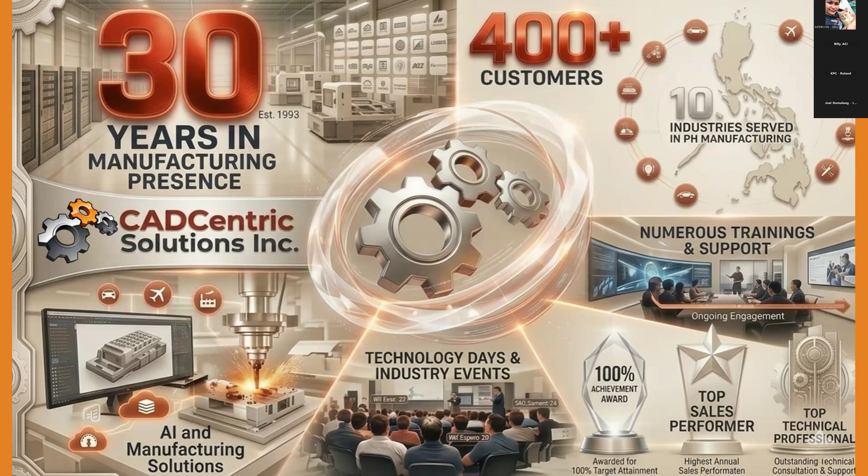As a tier 1 supplier, we excel in customer demos, trainings, and support, achieving the highest new customer acquisition in the AP South region in 2025. Beyond webinars, we also organize successful industry events and technology days where customers can explore new technologies and interact with other trusted suppliers and partners. Our achievements last year include the 100% Achievement Award, Top Sales Performer in CAA region, which was awarded to Miss Luz Basan, and Top Elite Engineer in CAA region, which was awarded to Mr. Claude Santos.

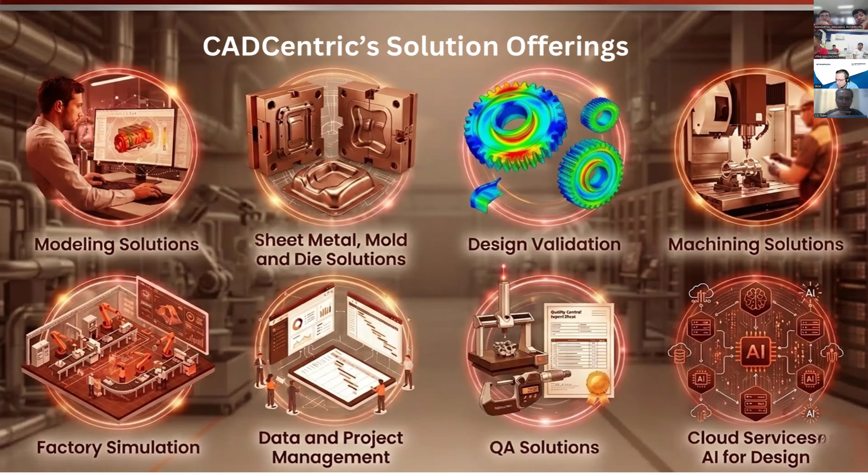I know trial and error may be a common approach and it works, but it also comes with challenges like rework, delays, and material waste. If we look at the manufacturing landscape here in the Philippines, industries like automotive, electronics, and metal fabrication continue to grow, and many of our companies are part of global supply chains.

That also means higher expectations—faster delivery, better quality, and lower cost. So the challenge is that a lot of validation is still done physically.

Of course, you design, then you test, adjust, and repeat it. While that process works, it's not always efficient, especially when multiple tryouts are involved. So the question is, how do we reduce trial and error and catch problems earlier?

This is where we're seeing a shift toward a more simulation-driven approach—validating the process during the design stage instead of during production.

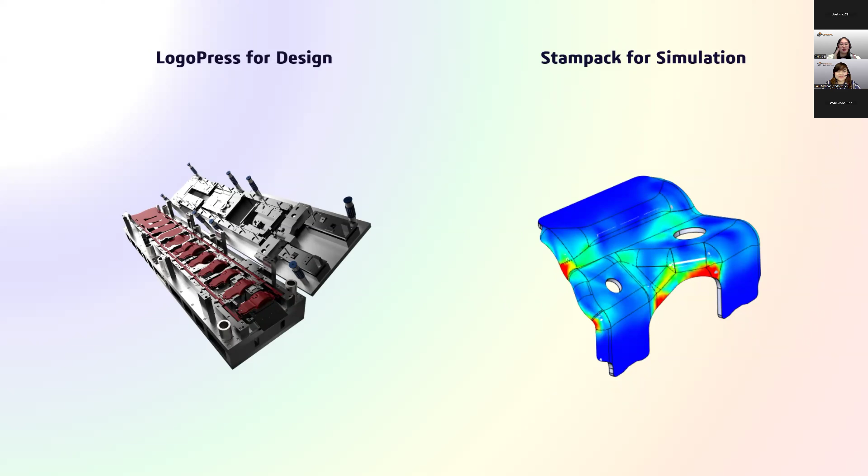That's why what we'll be discussing today is how tools like LogoPress for design and STAMPACK for simulation can help you move toward a more efficient and predictable workflow. So with that, let's start our technical discussion.

To guide us through the technical discussion, we have someone with extensive experience in the manufacturing industry, who has worked closely with companies to improve their processes and efficiency. Today, he will discuss common challenges in the industry, such as trial and error, delays, and scrap, followed by a brief introduction to LogoPress. He will also share how these solutions can be applied in the Philippine market, along with their benefits on a global scale. With that, I'll hand it over to our technical team leader, Sir Sonny Rivera.

Sir Sonny? Yeah, thank you Miss Ana. That was such a nice introduction. Okay, let me share my screen.

CSI will present LogoPress and STAMPACK. LogoPress can automate your tool and die designs—usually we make progressive dies, right?

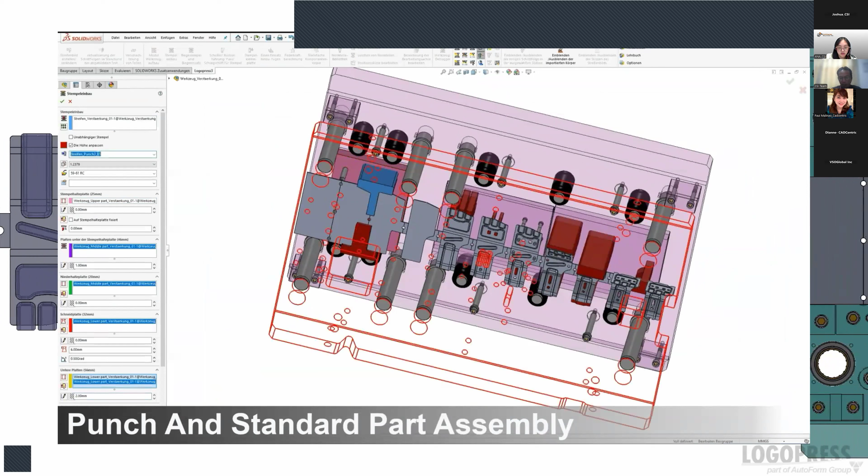LogoPress is very good in having a library of tool structures. Even the standard components, we have them there, prepared so we can just drag and drop, choose from our library, and it automatically inserts into our tool and die components. LogoPress has at least 100 plus components, supported by at least 50 different manufacturers of die and components, die design components, and also plates.

Usually we order these plates in advance so production is faster, instead of buying raw materials and having to machine it, flattening and squaring. Usually we buy it already as blank.

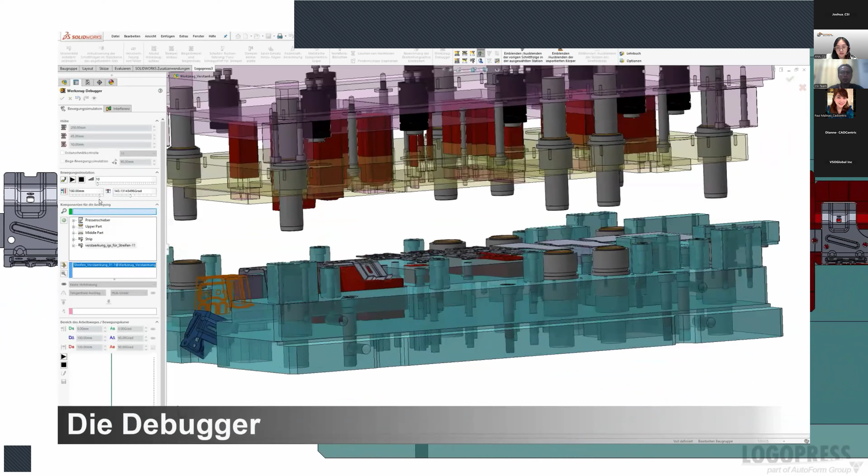Nowadays, when I was in a tool and die manufacturing company where I was also a leader, we used to buy our tool structures from Japan. From there, we design the punch and die ourselves, so that's what we create to make production faster, since we are targeting at least 4 to 7 dies per week.

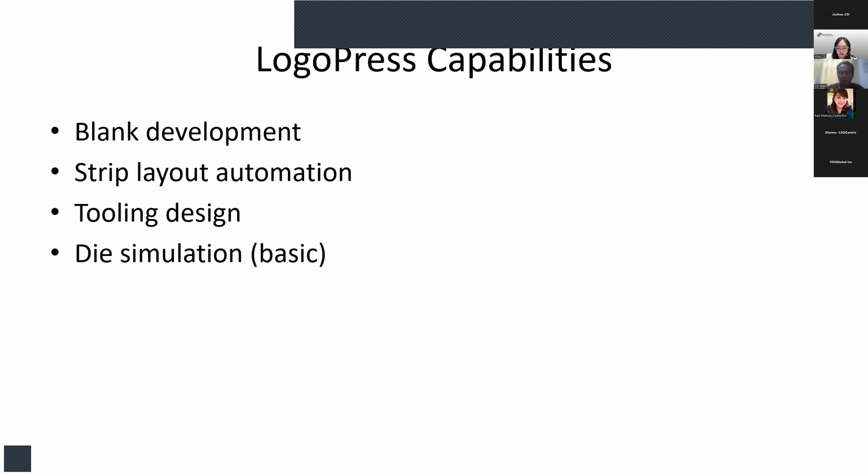Other than that, we have more challenges during our die design, like springbacks and dimensional accuracy problems. Not all materials behave the way we calculate, like when we think if we bend it 90 degrees it will automatically be 90, but we have springback. Depending on the material, whether it's stainless or plain carbon steel, the springback varies, so we need to adjust.

Dimensional accuracy is really the biggest challenge, because at the start of the process we just estimate our blank size. Later on, after the whole process happens and we measure the actual parts we tried out, only then can we adjust the blank size.

So what we do is always use laser cutting for the blank size, or what's called wire cut. Other challenges are the trim lines in blank development, and also thinning and cracking, which we usually encounter during the tryout process.

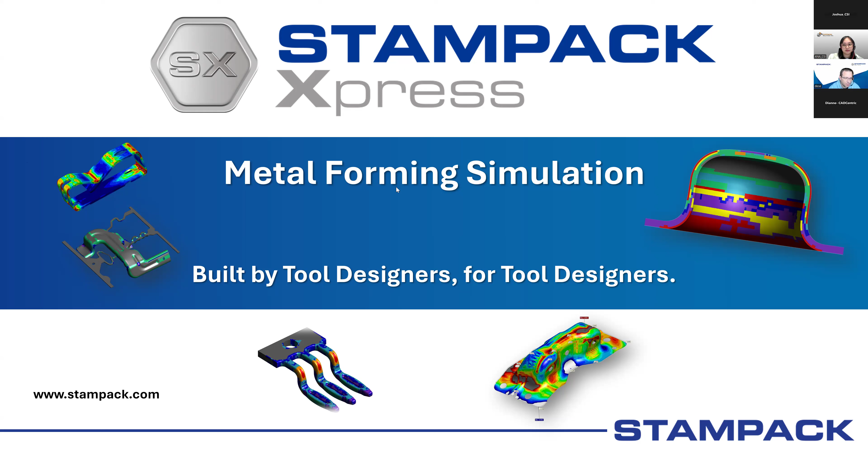I think you will definitely reflect on your own daily processes during this presentation, thinking about where you are located now, and where you could be located by looking more into digitalization possibilities, especially with the CAD system and the simulation path, to combine your actual structure to get more benefits out of your processes, and of course, later, cost saving and time saving. But I will come back to this topic later.

So first, regarding our company, we are STAMPACK GmbH. STAMPACK GmbH was founded in 2018. The STAMPACK simulation solver itself is much older than our company. The first commercial version of STAMPACK was on the market in 1995. The structure of the solver was completely developed and innovated at the University of Barcelona in Spain.

The software grew over at least 20 years until 2018 in different kinds of market segments. But coming from the university side, it was some kind of scientific software, not directly specified for the industrial market itself. This was the opportunity where STAMPACK GmbH was founded. We had the possibility to acquire the complete team from the former STAMPACK version to bring the software to the next level, to an industrial standard level, where we feel the pain and gain of our customers and implement it into a better, more competent and smarter software.

So in 2022, the release of STAMPACK Xpress was fully made. And we've been working for 5 years, where the big Autoform group knocked on our doors and asked us, okay, what are the possibilities we have to get a better combination in the whole portfolio?

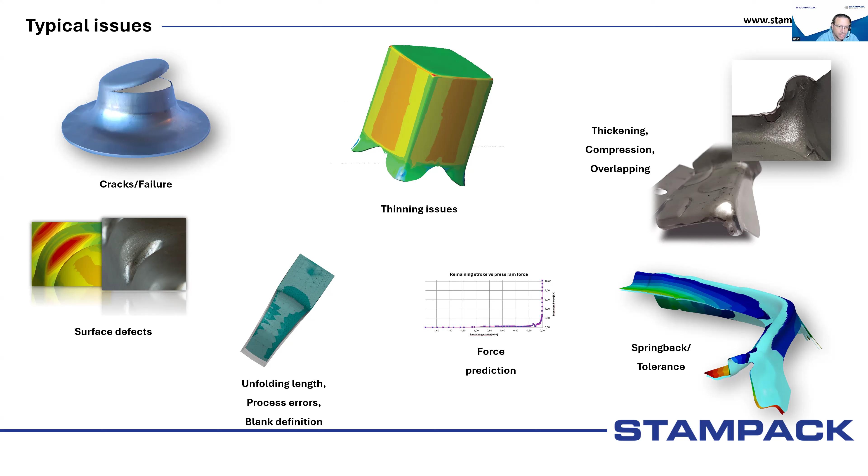So when we combine it into a specific area, I have selected four examples just to understand what we can do with simulation for these, more or less, easy examples. When we have some kind of blade like that, detection of cracks and correction of cracks is one of the parts you have to do. There are some typical areas in certain parts where you have problems.

Another one is some kind of crimp connector part. What are my correct bending angles to get the correct springback? What are the correct bending angles to set up one stage after another, to more or less close the material completely and in a good way?

Or the springback compensation. When we have springback issues, anything that happens in this area, maybe we should have a closer look. We can also go inside this one to feel through a little example for that. What is the challenge?

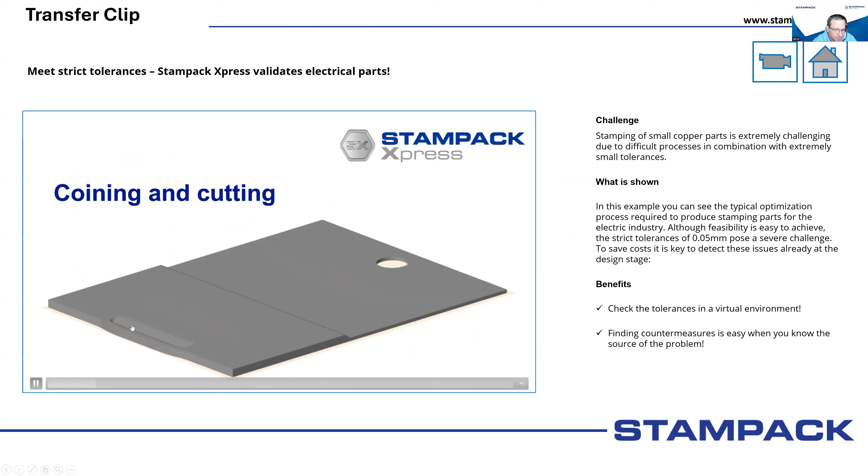More or less, each step will be simulated in the software, each single step with the tool design you want to try. You see in every stage what's happened with the part. You see the bending operations, you see the coining operations, you see the forces needed, including the forces needed for holding down the part.

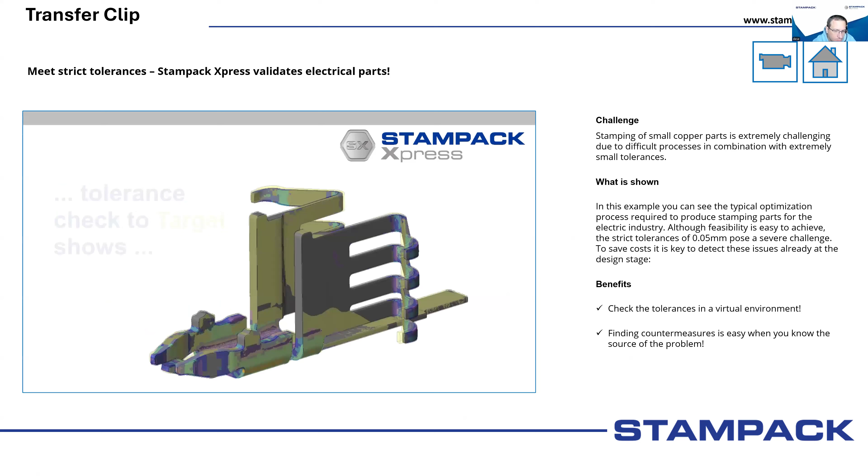And of course, then you get your results later on. Then you can compare it to your optimal design and see, okay, my safety zone, so my feasibility itself, is quite good. But when we check the tolerance towards the target we want to have, we find some strong differences. What can we do? What's the idea? You see here, we have big differences.

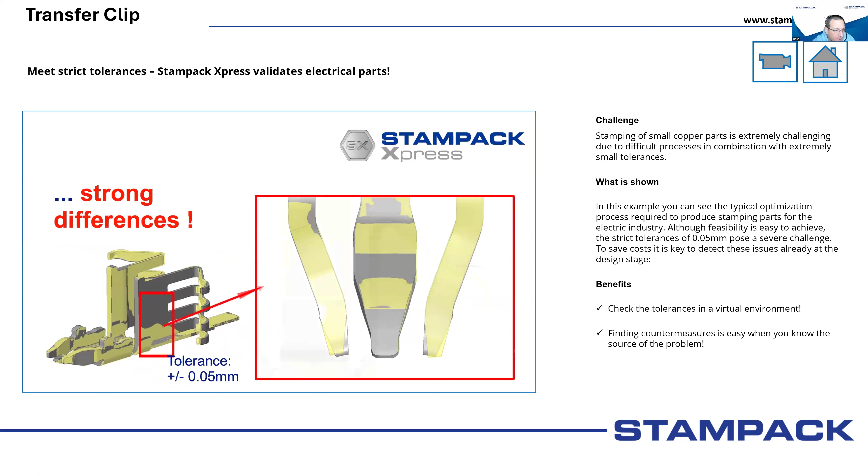By far, it's no problem to have that, because everybody knows in most cases what to do. We have to overbend, we have to rethink the design. But the problem is we only know it once the part is already manufactured, and that's the big problem we have.

So we have to transfer this approach into an earlier stage of the design phase. That's the big approach towards simulation. And to clarify that much more... oh, I'm sorry, I'm off of this presentation. Just one second.

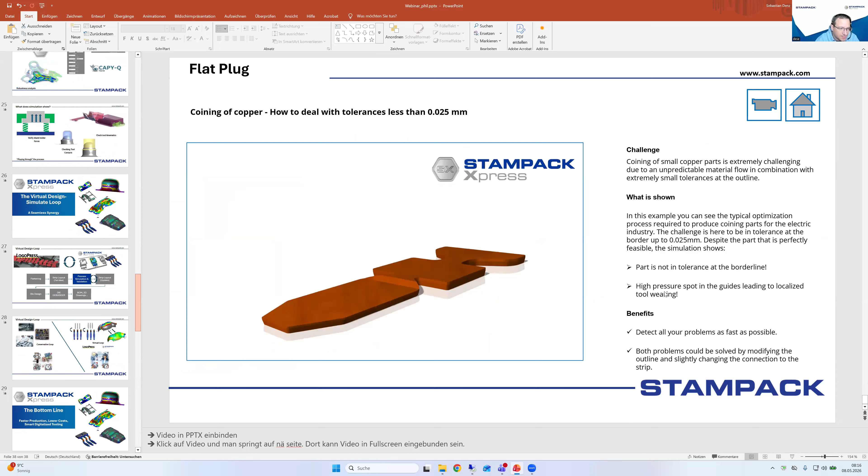Then we have to do a tool design, a tool assembly, maybe in between also a checkup tool, to see if any different areas are specific for us, and we go to our physical tryout. From the theory, it says that more or less 70% of the tool costs are included in the area from the product until the tool assembly, and 30% of the costs are included in the physical tryout itself.

Doing the tryouts, doing the loops you have to do, quite normal. And of course, when we find out that we have some problems in the first tryout of the tool, in the worst case, we have to go all the way back to the method and rethink our method plan in general.

This can have a big impact on the costing, the time, and all the related employees you use for that. Because when you have to recheck a physical tryout, who's included? There are the guys from the tool shop floor, the design development area fully included, some team leaders are included. So a huge impact on the personnel area is also included in this process. This is more or less the big part we have, not only the material part but also the physical part that we need in that case.

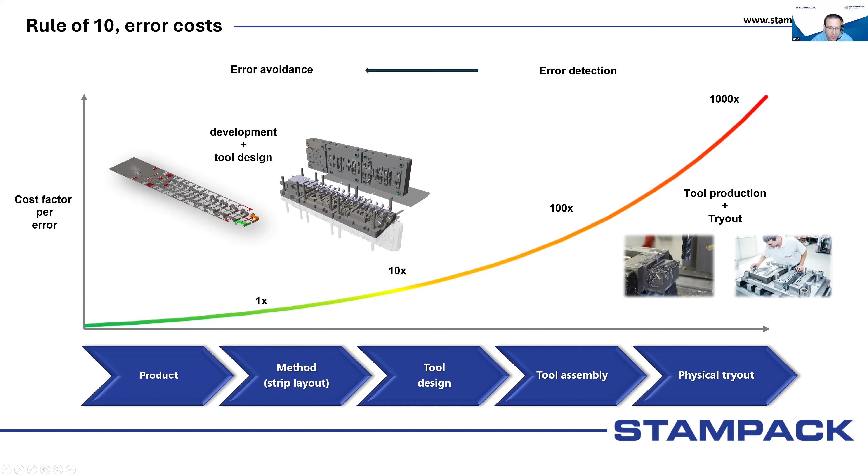The idea is to say, okay, when we check, or we have any error in the tool for example in the process, the later the error detection is, the higher the costs. That's more or less theory. What we want to provide is that we don't have these problems themselves.

So when we have the product chain, we integrate the simulation in between the method planning, strip layout design, and the tool design. We add more or less some kind of virtual tryout inside the process at an early stage. More or less we integrate a virtual press inside the process chain. That leads to us being able to do these iterations at a very early stage. And when you rethink about the costing, it's a very early stage, and only one person, maybe two, to discuss are integrated in this process. That's the big difference compared to the physical tryout.

First, of course, we have to design the process itself, so we have to do unbending as shown before. We have to rethink the method planning. For that use case we simply use the LogoPress area. So for that case, I have a short video for you to get a feeling, fully commented. I hope it works with the sound.

We have to check. Let's test, I think I have to share properly. So the video is now playing. You hear something actually? No, Sebastian, we cannot hear anything. Let's check, I think it's something with the settings of the Zoom toolbar. When you share, there's a button on your right side - you have to press share with sound. On the right side, you see it?

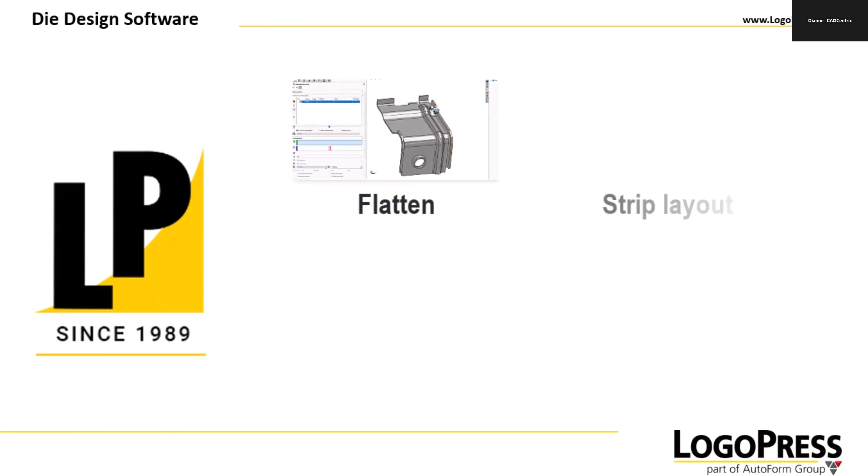With over 30 years of experience in die design, LogoPress has become a trusted worldwide leader, recognized for its powerful automation, intuitive workflow, and deep engineering capabilities. Designed for efficiency and accuracy, LogoPress enables designers to quickly predict their blank and evaluate formability risks, easily generate reliable strip layouts that can also be automatically updated for engineering changes, then model the tool faster thanks to hundreds of dedicated commands and features, including die debugger. Design changes are automatically done thanks to built-in parametric modeling. This significantly reduces rework, streamlines quoting, and overall shortens design cycles. LogoPress also integrates seamlessly into modern tool design workflows. When paired with forming technologies like STAMPACK, users gain a complete design and validation loop, allowing issues such as springback, thinning, splitting, and wrinkling to be detected before production.

Let's start with Flatten. LogoPress Flatten is a fast, intuitive, and highly accurate solution for generating flat patterns from even the most complex 3D formed parts. It enables designers, estimators, and tool makers to work directly within their familiar environment while processing both native and imported geometries with ease. The software excels at handling double curved geometry and complex 3D shapes. This makes it valuable for tool and die operations in industries like automotive, connectors, aerospace, packaging, and medical. Its support for full and partial unbending and automatic K-factor calculation ensures exceptional accuracy across a wide variety of materials and part conditions.

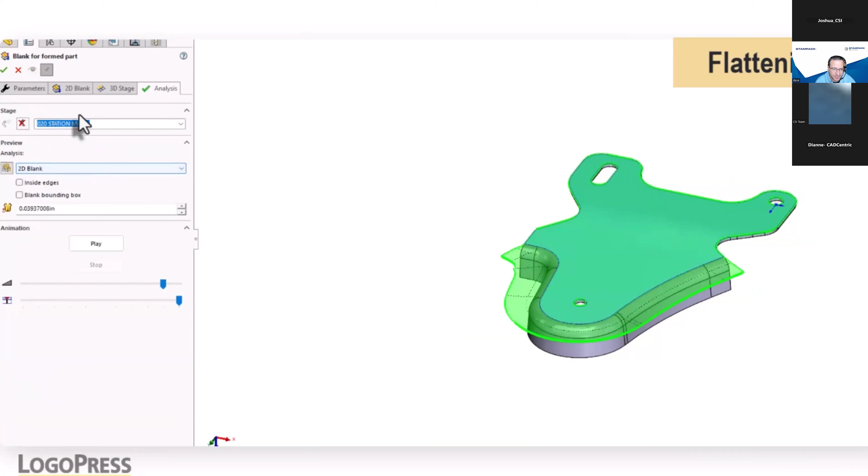Actually, there's no further comment inside the video. So what you see now is the classical approach to the unbending software. It's very nice, done well from the software side. What's also very nice from my side, because I saw LogoPress 2 years ago for the first time, is also the visualization itself in the software, to get a feeling of what's happening, to get the idea in a very common way, to get a first impression also of thinning areas for example, parallel to the classical simulation approach. That's more or less the right common situation in that case.

By enabling rapid flattening and early verification of forming behavior, LogoPress Flatten streamlines quoting, reduces uncertainty, and enhances communication between engineers and manufacturing teams, ultimately accelerating development cycles and improving part quality.

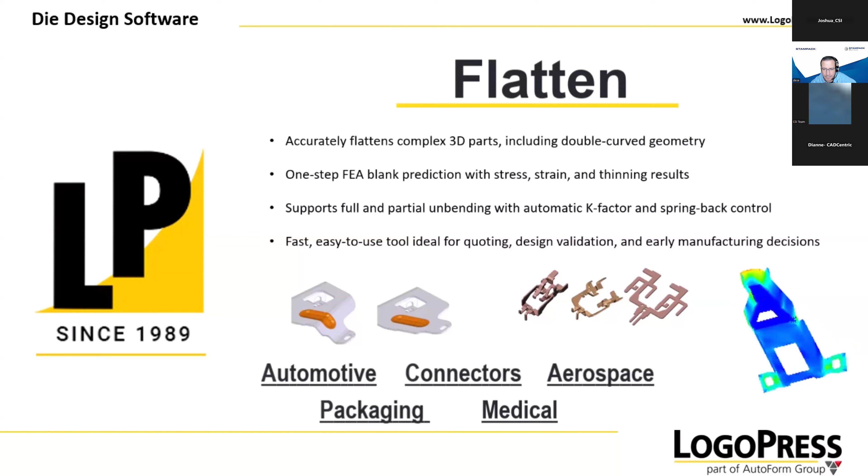LogoPress strip layout is the next step in the stamping workflow, transforming the theoretical blank generated in LogoPress Flatten into a complete manufacturable strip. While Flatten provides accurate FEA-based blank prediction for complex 3D parts, strip layout expands this foundation into a full process-ready layout used for die development, feasibility checks, and quoting.

With strip layout, toolmakers gain powerful capabilities such as rapid strip creation, material optimization, and reliable pitch calculation. The system also delivers cutting force and tonnage estimation, punch information, and other requirements needed to validate a concept and produce accurate quotes within minutes.

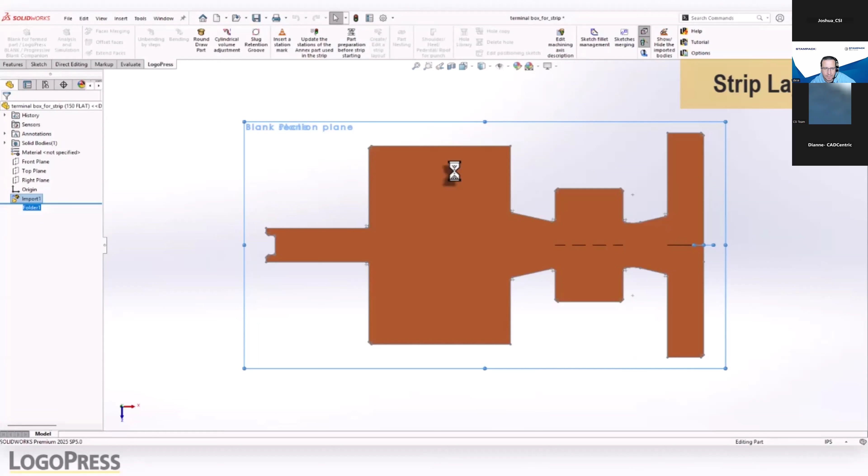The next step I will show now is to integrate each area of the layout towards the strip design, so the customer can decide which kind of bending situation we want to have. You don't have to implement all areas. You can directly configure which kind of area we want, which kind of stage we want, and in which station we want that. The system automatically regenerates the strip design for you.

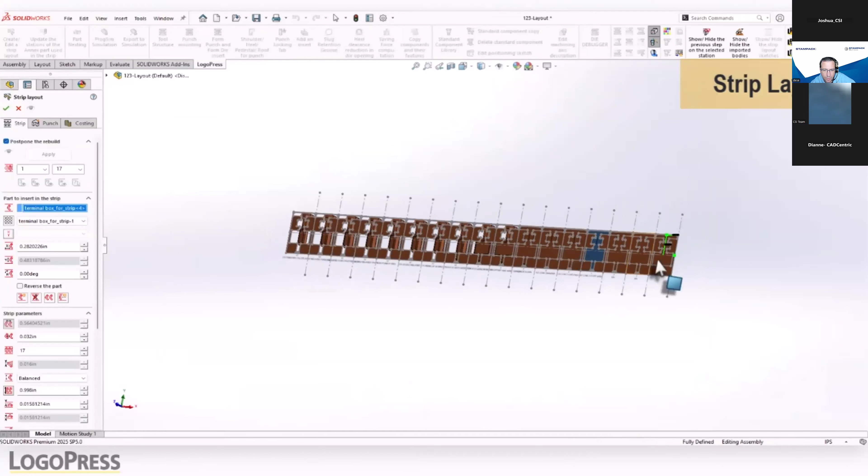You can implement idle stations if needed and continue with the full strip design. It will be fully developed, and that's what's going to happen now in a very accurate way, to have the full predefined strip design for the first stage.

Then of course you can do several adjustments for the first approach, doing the feeding, doing the in-between waste area, to check whether you have process-added material for the strip connection, for example. You can play around with the parameters, let me say it like that, to define the strip design as you want to have it in that area.

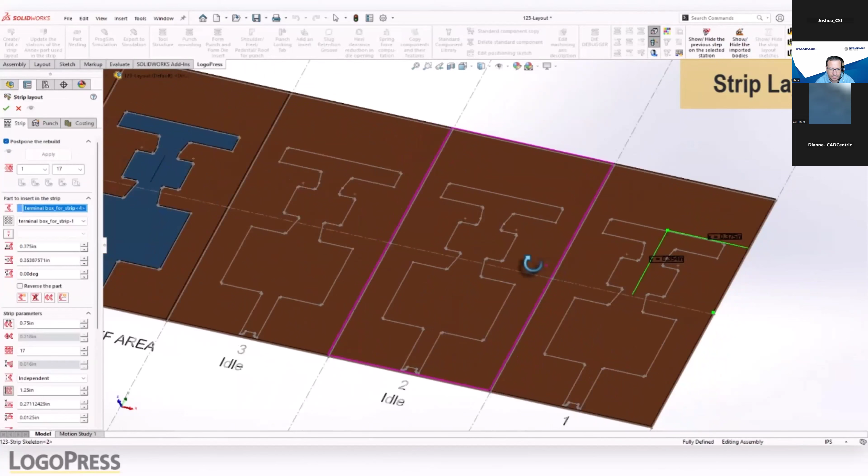What the video is now showing is setting up the first cutting punch. It will fully automatically detect the pre-shape area of the part, and you directly generate the cutting punch for that area.

In that case, the quick and dirty approach: we do the sketch with the area of the punch, then select the correct way, directly transferred throughout the complete strip design. It will be fully updated automatically when you do the first approach towards this, and then we go to the next step of the code.

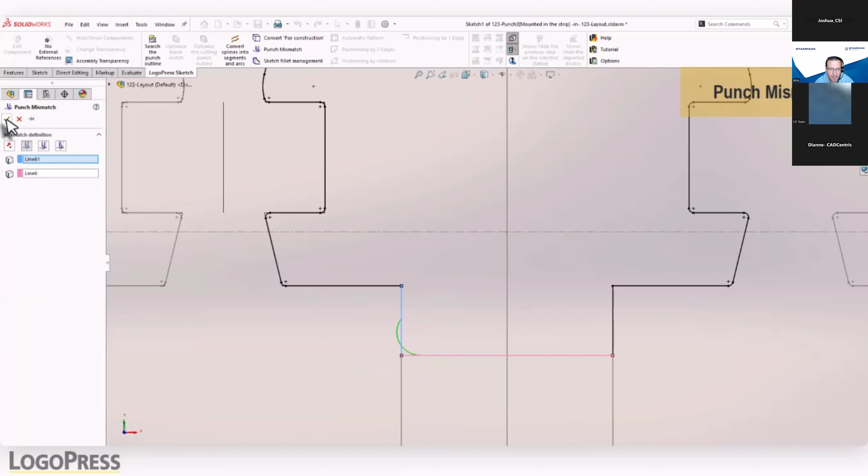So doing here now, adding the punch mismatch in different shape areas, defining what you want. Every approach is possible in that case.

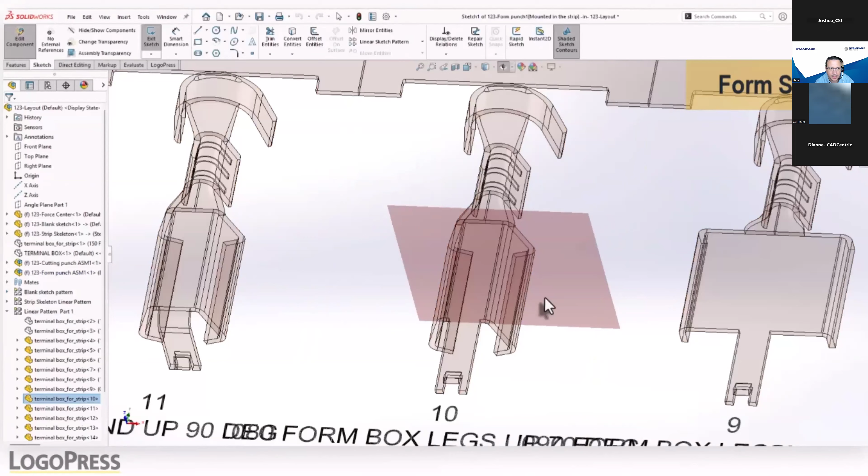And then finally have a closer look to set up, for example, also the bending punch. That's what's shown here, how to generate the form steels, for example. Very quick and easy - the system directly sees we have some surfaces integrated in the part, and then we regenerate the system here.

Another approach that we have in the system is the fully automatic generating of a strip design and also an unfolding design, using simple mathematical formulas to directly set up a so-called unfolding of a round drawn part. It's fully done automatically. You can also directly implement fully automatically the strip connections towards this, depending on what you want to have.

By turning an accurate theoretical blank into a well-structured strip, LogoPress strip layout helps teams standardize processes, reduce engineering time, and accelerate tool planning, from concept to press-ready validation.

Into our last subject, LogoPress Die Design. This is the biggest part of the LogoPress family. LogoPress Die Design is a comprehensive, production-focused solution built to streamline the creation of dies used for forming, cutting, embossing, and shaping sheet metal parts. Designed specifically for tooling engineers and manufacturers, it provides an intuitive environment for building accurate, manufacturable die designs directly inside SOLIDWORKS.

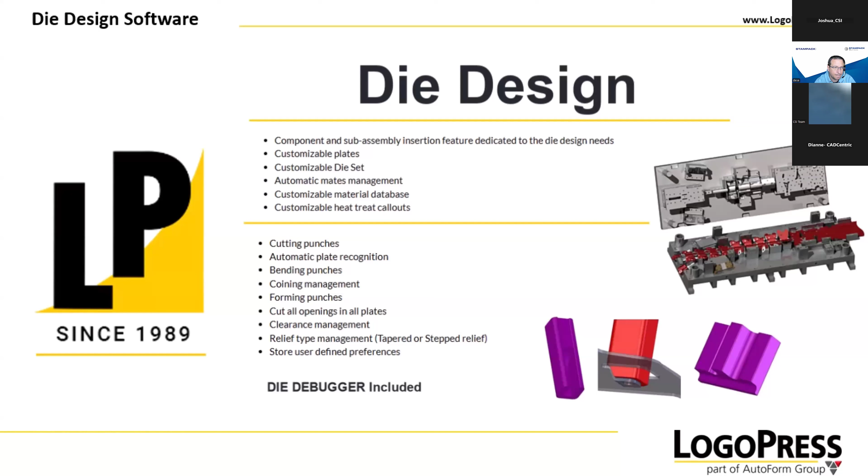A standout feature of the LogoPress Die Design package is the LogoPress Die Debugger, a powerful virtual simulation tool that allows you to visually test and validate how a die functions before any steel is cut. With Die Debugger, designers can animate the die's motion, detect interferences, check timing, and ensure components are behaving exactly as intended throughout the stamping process. This significantly reduces trial and error, shortens debug cycles, and helps catch costly issues early in the design phase.

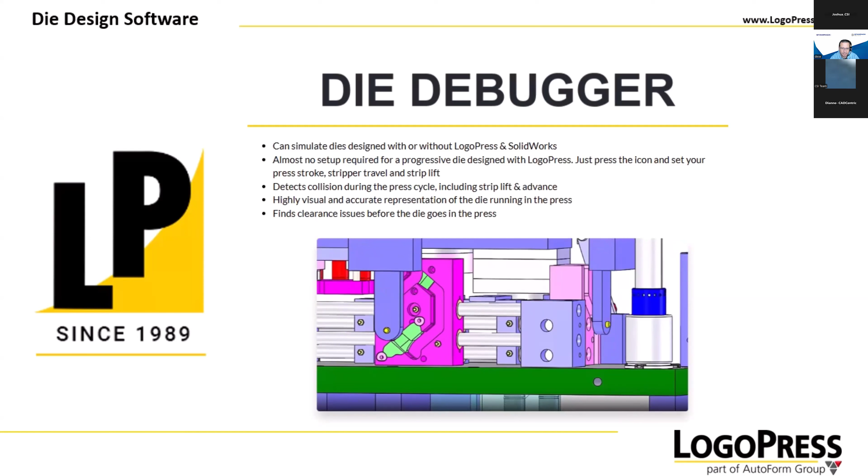Beyond this simulation, LogoPress Die Design offers an extensive library of die components, automated functions for building die sets, tools for working with strip layouts, and intelligent features that reduce repetitive tasks. Combined, these great capabilities allow engineers to design more efficiently, improve tool accuracy, and deliver reliable results with greater confidence. Whether you're developing single dies or highly complex progressive systems, LogoPress Die Design provides a complete workflow from concept to production.

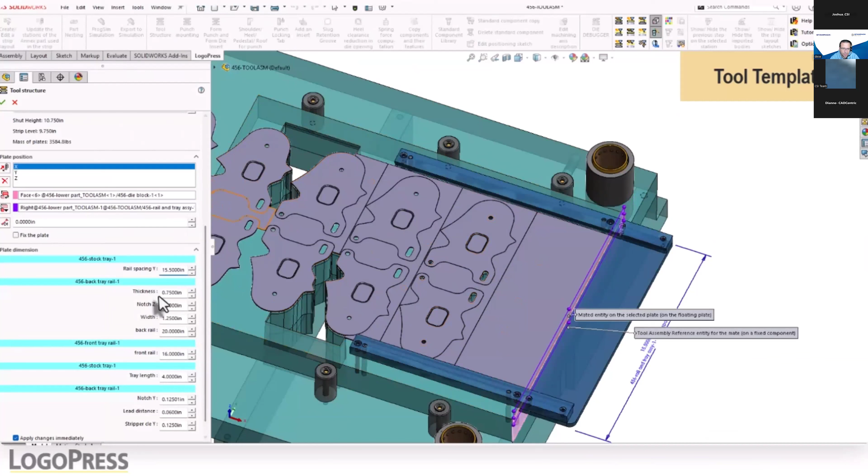So one last time, let's dive into the software. What we are showing now is the more or less predefined tool design, where we have integrated the base of the tool, also the top areas of the tool, directly going to the next step to implement the strip layout, to change the spacing, to define more or less the presets of this area, for the guiding of the strip design. So also here, several additions and adjustments are possible directly in the menu, not directly in the SolidWorks design, so completely menued by the system itself to change these areas step by step.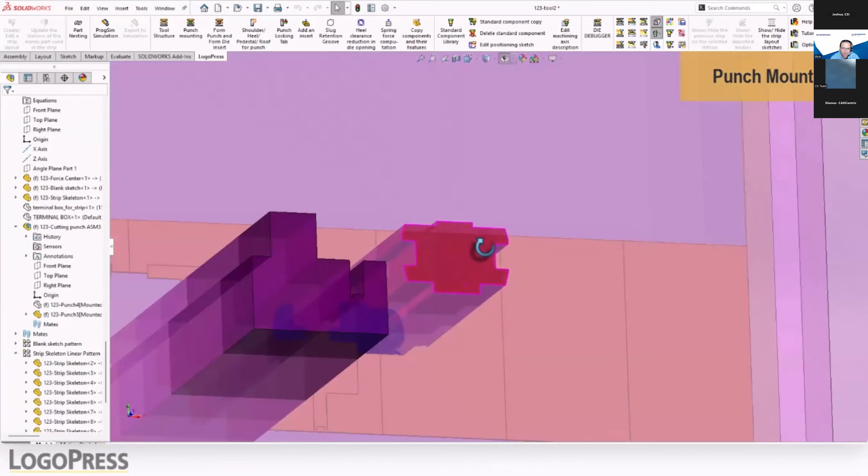Of course, the tool design takes a long time, so it's not fully shown here, but to have a feeling how it's working. What we see now is the direct integration of the predefined cutting punches, for example, the full redesign, and when we look forward to the result, also the full mounting of the punch, with the spaces. Also, you see that the area for the waste throughout the plates in the bottom part are fully integrated and can be fully predefined using your own standards directly inside the system.

Next step is showing the standard components. We have a huge database integrated in the system for standard components coming directly from the customer, from the areas here. For example, for Meusburger setup or any other suppliers you want to have, it can be fully integrated with the part itself and all the machining areas also.

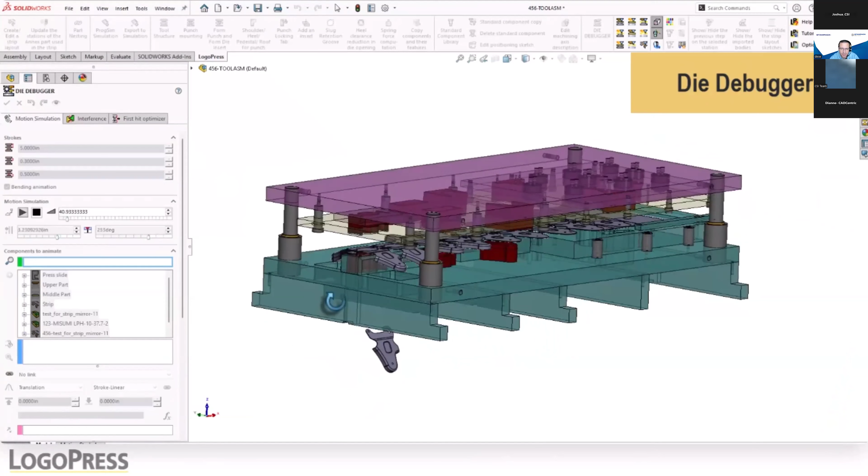So finally, we're going to the die debugger section to check if we have any interferences in the part itself. Do we have any mismatches? Do we have any faults inside the material that we're going to crash into on the first physical tryout? Do we have any functionality errors of the tool itself, and also to visualize the general movement of the tool? Now we go to the interference check, and you see, okay, there's something happening, and you can directly let the system show where it's going to happen. So we have here an error in between the stripper height. So this.

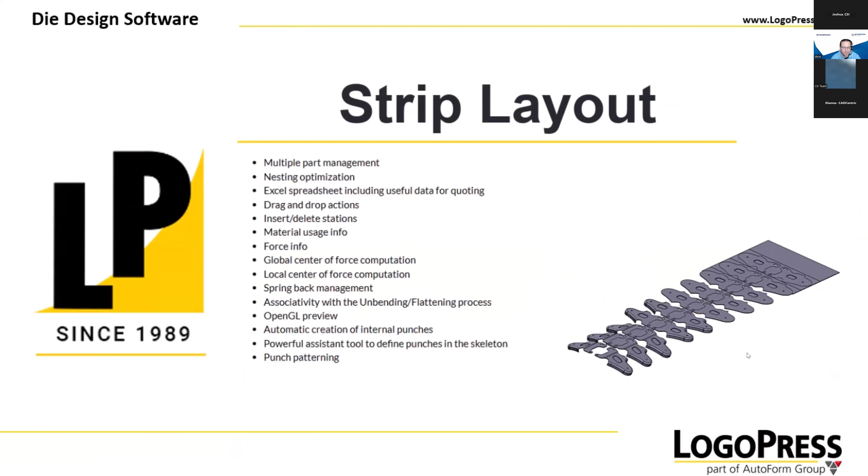So when we continue, we show the next step to the virtual press, to the values of simulation. As we've seen, we have two kinds of simulation solvers integrated in the software. That means for each type of part you want to simulate, you will have different requirements towards the simulation itself. So we have two solvers integrated in our software: the so-called shell simulation, which is the simulation on the flat base, and the solid simulation. The shell simulation is done for the classical automotive part, for thin sheets, meaning 1 millimeter or less in thickness, with larger radii.

For thick sheets with small radii, meaning the bending radius or forming radius is smaller than the sheet thickness itself, it gives you a suiting meaningful first impression, but not the detailed result you want. The shell result has a very fast, short calculation time and gives you a very fast and efficient result on one hand. For the other parts, especially connector areas or parts with compression zones inside, or a mismatch between thickness and the smallest radii, you have to switch over to the solid simulation.

Because the solid simulation is a much more detailed simulation in that case, stresses and strains along thickness are also considered. You have very high resolution towards the measurement, and maximal precision. It's very important to use in case of thick sheets and small radius, when you have massive deformation in local areas, and you have the possibility to detect surface defects in very, very high detail.

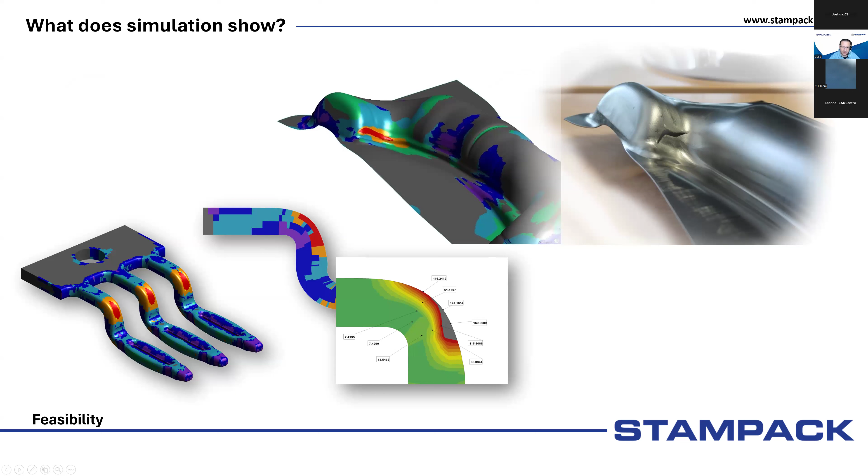But the much more important thing is not only whether it has a crack or not. The much more important thing is how far away I am from a failure. Is it more or less a running-along-the-edge situation? Are you nearby a fail or not? Or are we far away? Because this has two interesting features.

The first is when we are nearby the 100% marker, that means we're going into the fail. We have 0.7% left in our feasibility. That means any changes in the tool, any changes in the material, and we are running towards the crack.

On the other hand, when we have 20% left, we can rethink our design. What's going to happen when we only took 4 stages at least, and we planned only with 5? Does it have any effect? Can we go more risk towards our tool design? Because we know now that we are simply in good conditions. So we maybe also have a big advantage towards the competitors that want to have this tool.

So also in the pre-ordering of the system, in the first visit, you can say, okay, we at least planned with 5, but the simulation shows that with 4 it's also okay. And it gives you a big advantage also in the design.

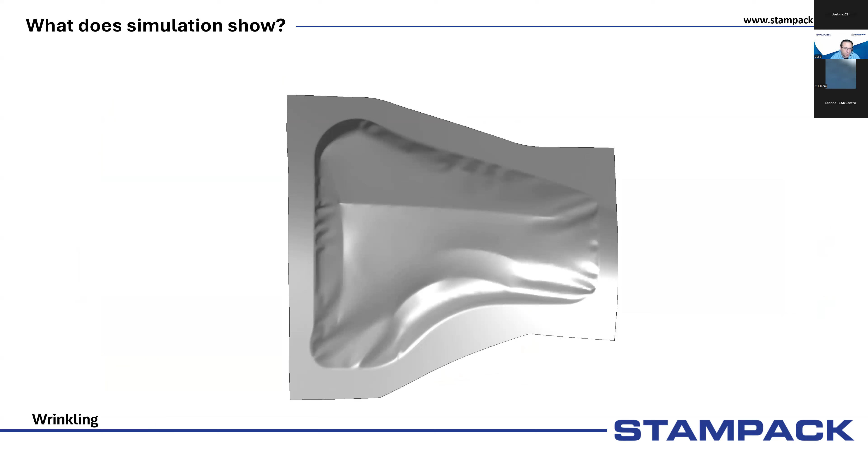Then the classical approach for automotive is the detection of wrinkling. As Sunny said before, it's a very big task in the topic, where we have problems and we have to decide if it's good enough or not. Where are they? What can we do to intervene in that area?

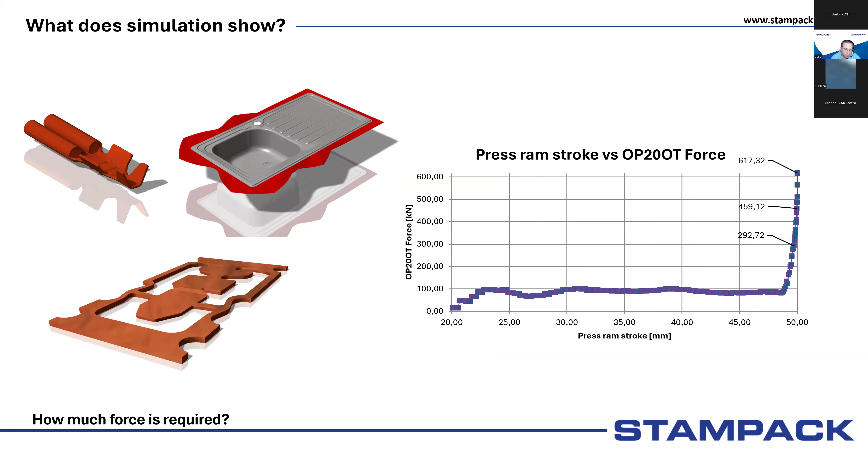Force. Everything that happens with force inside a tool. It could be the blank holder force, it could be the press force itself, it could be the complete cutting force you need, can be directly simulated virtually to give an idea of what kind of force we need for the hold down of the material, for the lifting of the material. Independently, you will get the full information inside the software.

And when we ask somebody about what he's thinking about simulation, what does it show? Then more or less always the guys have in mind the feasibility situation, crack detection. But much more interesting is how good is the quality of the part itself? Are we in tolerance? Of course, we have a feasibility part, it's quite good, but is it in tolerance, yes or no?

That's the big question, because this is more or less the final decision of our customer, that they say, okay, your part is good or your part is not good at all. You have possibilities to do the tolerance check, to compare the simulation results to the nominal part that we want to have, and see in which areas we are out of tolerance or in tolerance, to directly go back to the tool design or go back to the strip layout, do the first iterations virtually to recheck and get a better quality result in the first tryout later on.

Then the springback and the springback compensation. So what is integrated in the software? You have the possibility to calculate the springback itself. But on the other hand, the software gives you the idea how to compensate your tools to get into a good position towards the tolerance.

So it will be fully automated. Redesign your tools, run another simulation, recheck if it's better or not, run another simulation, recheck once again until we go into the line, we say okay, we are fully in tolerance, and then we take out these tools for the first tryout in the physical world.

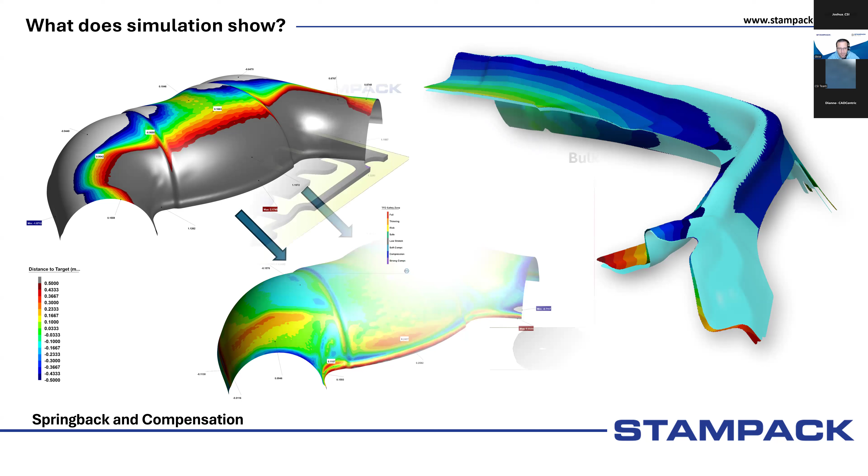A very interesting feature is the possibility of coining, because it's very related to the simulation of a solid solver. Some kinds of coinings can only be run with solid simulation, it's impossible to run such simulations with the classical shell simulation solver. That's why we have both options inside our system, so you can decide, okay, I have a part that's classical shell based, and a part that has to be calculated in the solid solver, and the customer can easily switch inside the software.

Trimline optimization is one of the biggest things we have in the software, because it's something fully made in the physical tryout. When you do the first loops inside your tool, you use a predefined strip design to check whether your predefined blank is good or not.

In the simulation, you can directly see what's going to happen, and you can tell the system, please redefine my initial blank outline to best fit the part. For example, we start with a first simulation where we have an initial deviation of 2.5 millimeters towards the final outline we want. The system then regenerates the blank cutting automatically for you to get closer to the target, and iterates as long as you want to fit the target more. Then you take this outline from the simulation back to LogoPress and redesign the strip layout in a very common way.

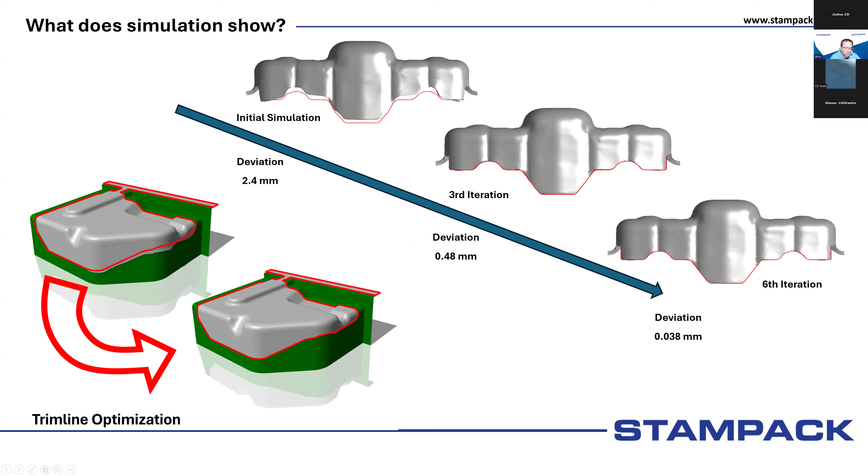Finally, we have the possibility to run a robustness analysis inside the software to get a feeling for which parameters in our system are the most important. Is it the material characteristics? Is it the blank itself? You can play around with the software and see that a variation of the thickness in the coil is a problem for us, or a variation in tensile strength could long-term be a problem. When the yield tensile strength varies, our target or tolerance goes out of the normal state. This gives a feeling for what is the most important parameter in our process, and what we have to check and secure so it's not varying.

Finally, very easy but very common is the educational possibility. You can play with the process inside the software. In the physical tryout you have to manufacture, then see what happened, then remanufacture and see what happened again. In the virtual tryout you can play around more: increase the blank holder force, see what's going to happen, lower the blank holder, directly see, and then you get a feeling for the process itself.

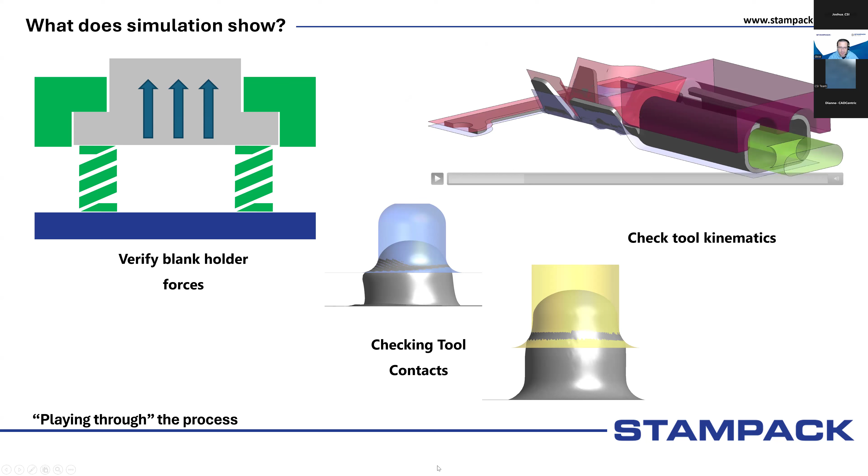When you look at this area on top, you also have the possibility to look inside the tool. In a physical press, you close the press and then you see the result, but it's very difficult to look inside. In the simulation, you have the possibility to use cutting sections, as in a CAD system, to see where the first impact of the bending parts happens. Does the material flow as I want, or does something happen that I hadn't seen before? Then we have to say, okay, we can't do that, we have to redesign that area to get a better result. That's something you can only do in the virtual simulation.

I want to go with you now inside the software to get a feeling for its usage, to see what you have to do to set up a simulation very quickly, because it's made from tool designers for tool designers, so it's very easy to use. We recommend at least 3 to 3.5 days of training to get into the software, because it's very easy to learn, since the structure of the software is always the same. Independently of whether we do an automotive part, connector area, or embossed sheets, it's always the same approach in the software. I want to show you on one stage how fast it goes to set up a simulation in our software.

So this is the interface you see now. We have here on top some kind of timeline, where you play from the first step to the last steps to the results. Left is your work area. So first, we go to the next step, and the system wants a name for the project, so we have to save it.

Next step, blank definition. First, the system wants from you the thickness - in our case, 3 millimeters. Then we have the decision of shell and solid simulation, and you can always switch this area as you want.

You can start with shell, switch back later to solid, or backwards if you want. You don't have to redesign the complete simulation itself - only click on this button and rerun the simulation. That's quite easy, and this makes it possible to more or less play the ball to each other.

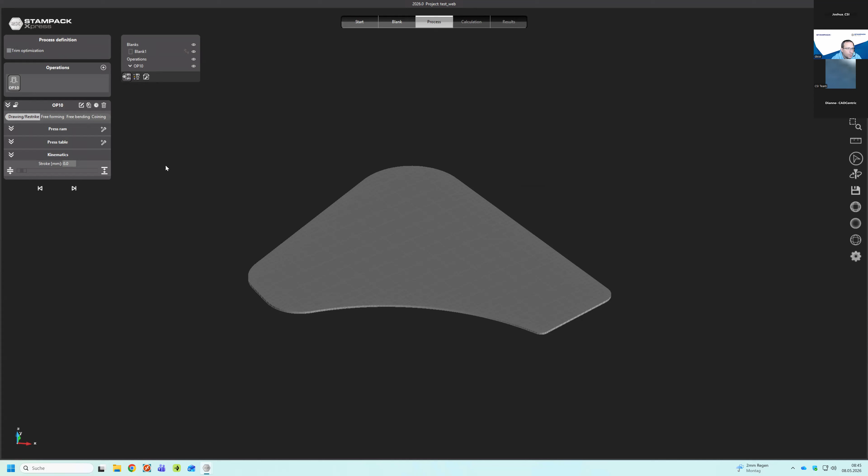What you need for that is simply to import the defined tools coming from LogoPress, for example - in that case, 2 tools, the upper and lower part of the part. So for the first stage, flattened based, fully integrated.

You can add it as classical step parts, as predefined STL meshes, so we are completely neutral on the inside of the approaches - also NX, Parasolid, and of course classical neutral areas are possible in that area.

The only thing you have to do now is simply drag and drop the tool inside the area where it is in your physical tool. We have a press RAM area, we have a press table area - simply drag and drop, that's a punch on top, and it will be directly inside. Simply drag and drop the lower part, and that's all.

Now the kinematics of the tool are fully ready. The system is loaded in a closed condition, so it knows that's the closest point, the deepest point of the tool. We simply open the tool and close it once again in the simulation - that's what the system is doing, more or less.

Now the system is running, so the complete geometry is handed over to the calculation solver - that's what we've seen here in this output information. Now it's starting.

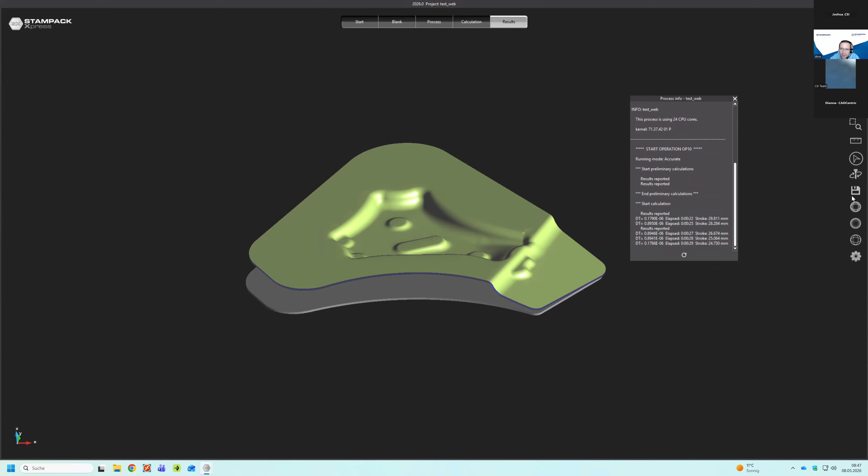I will run it just to have a feeling and to show you what's going to happen now. He first writes some results, and you see now, okay, we need at least 30 millimeters of stroke that will be directly calculated. And now he's starting. He's closing step by step the press. We can go directly to the result area and see what is the result actually.

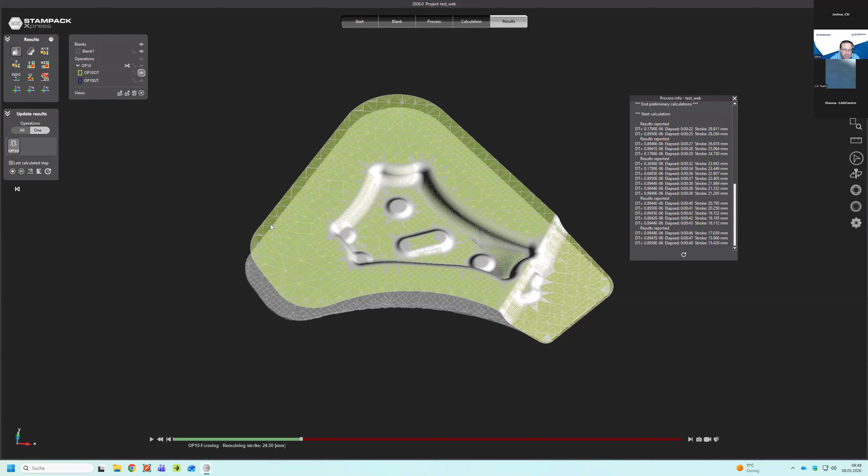So what's going to happen now? He's starting to close, and we see one functionality we have here. He's starting to refine the mesh in the local areas. That means the system has an automatic feature to detect where it's closing with a smaller radius than the mesh size we have here, to see that we need to refine the mesh structure in this area to get a better result.

This makes this simulation and also the calculation time as powerful. Now you see what's happening. He's refining this area directly. This gives a huge impact to the calculation power we have, so that a volume solver like that is ready within 1 or 2 minutes with the result of one stage. And that's not quite common. In that area, we are the only system in the market that has this fully automatic functionality in the volume solver. This gives us the power to be 5 until 8 times faster in calculation time compared to competitive simulation softwares.

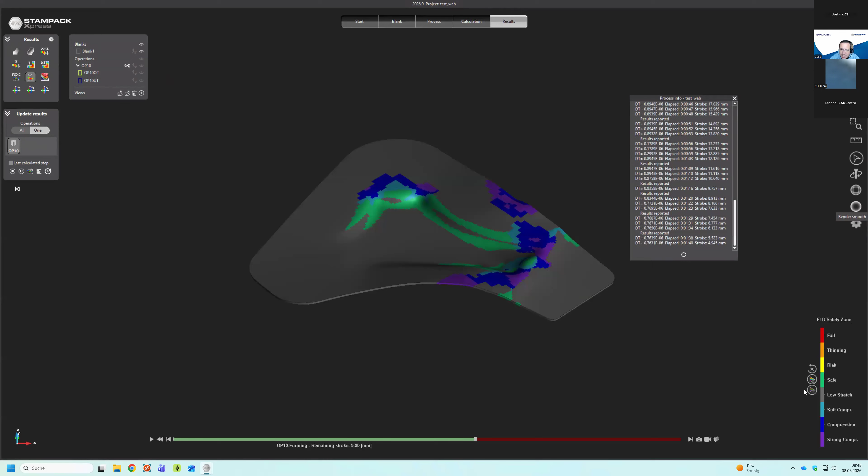Of course, inside this area, we can look onto the actual status of the results. We can look for safety zones. We can look for thinnings and so on. But I don't want to show you all the features because we have much more inside. I want to go back now to the software, to the slideshow itself, to give you further information about the process.

So what is now the synergy between the tool design and the simulation loop? As I said before, we have on one side the LogoPress area with the flattening, the strip layout for the first idea. Then we go first time to the process and validation simulation. We iterate with the strip layout, update it inside the CAD system, very quick and easy.

We iterate the simulation once again. We get the information of the springback, the compensation of the springback, trimline optimization, and so on, until we define the perfect strip layout where we say, okay, now that's the perfect match. That's the strip design we want to go to the physical tryout later on. And then we continue with the die design, with the die debugger, and of course, later on with the manufacturing.

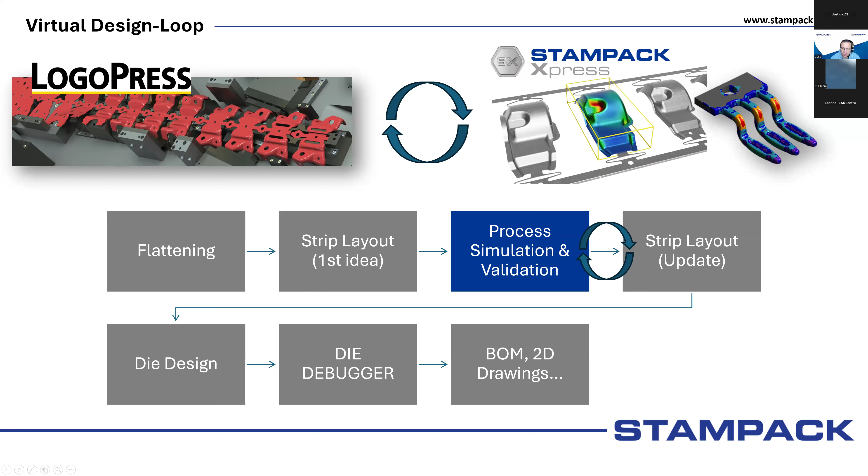When you compare this now with the conventional loop until the virtual loop of LogoPress, in the conventional loop you have to redesign the material, you have to redesign the tool itself. We have to check what we want to do because we have no idea what happens. We only see the result. We have first to check what happens. In the simulation, on the other hand, you directly see where it happens, why it happens.

You have the first idea what to do. You know the process much more better because you can look inside the process. And this leads to a big difference: time, cost saving, of course, and stress for the employees. It's a big topic. They have stress, they have to decide quickly what to do. And when you have to decide very quickly under pressure, you make faults directly.

You have an idea what to do and something happens, but it was not what you wanted to have. You are not in the target, so once again we iterate once again. In the virtual loop, we have much more time because you are in an earlier stage of the development. You are much more effective in this area.

Finally, let's go to the bottom line. We're always talking about costs, about being faster, being smarter, and so on. But what does it mean exactly? When you look at this, what are the potential benefits of those tryouts? We are talking about reducing tryout costs by far because you're getting better, but we are also talking about process simplification.

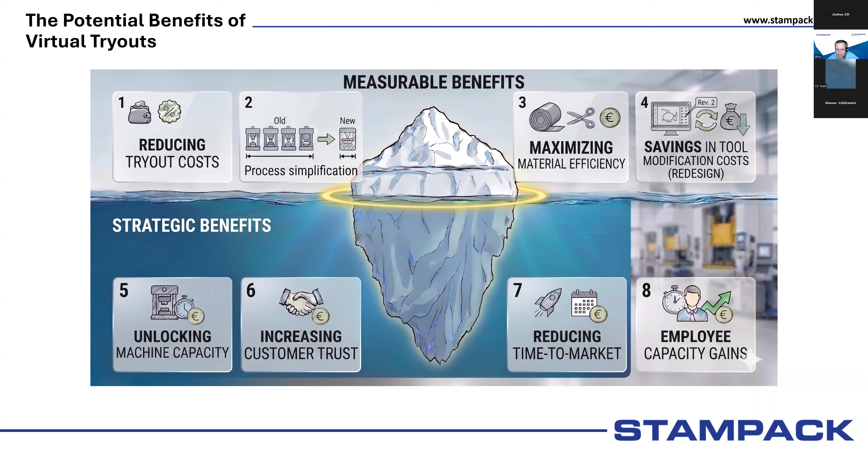When we think about costing itself, you can classify these potential areas directly: on one side only the tool shop, but when you think more globally, also the press shop. In a whole company we have a tool shop and a press shop, and there are some synergies in the costing, because the costing is fully made in the tool shop. Of course, you completely design the tool and bring it out to the press shop, but the effects have some kind of synergy with each other.

In the tool shop, we have savings from the reduction of correction loops. We have savings through optimizations in the tryout itself, because we are learning the process behavior and we know what's happening in the process. And we have savings through reduced tool lengths and complexities, because we may have a better approach towards the part - we don't have to make it as complicated, since we've seen in the simulation that it's working.

On the other hand, in the press shop area, we have savings through higher material utilization, as seen before. We have savings from the reduction of unplanned press line downtime, because we have to recheck if there are any issues. We have savings through lower scrap rates in production, since we know what's happening and have a stable process. And we have savings through the reduction of rework during the ramp-up phase, when you're in the startup phase bringing the material toward our customers.

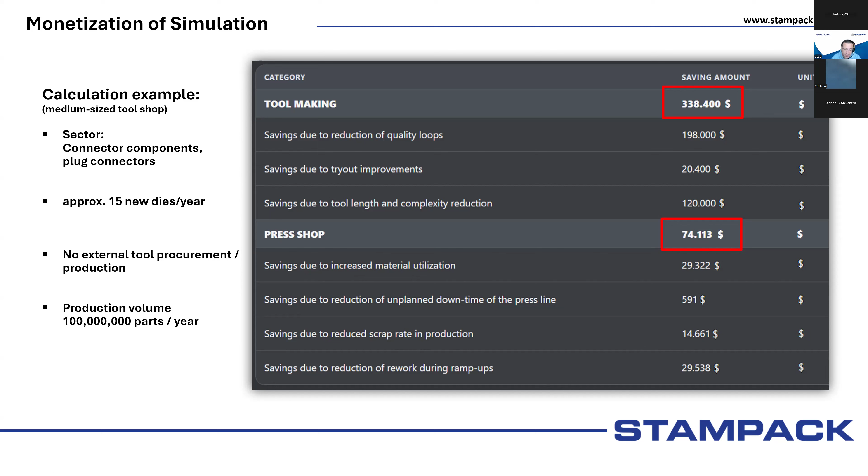On the other side, the number is not as high, but the number is there. Savings of material, 30,000. Savings in the scrap rate, 15,000. So there's also a huge impact when using simulation, and that's the big measure we want to show you today, to rethink your process chain in general, to set in a tryout via simulation in between our general design, to make our process better, to make our impact towards reality better, and to save time and money at least.

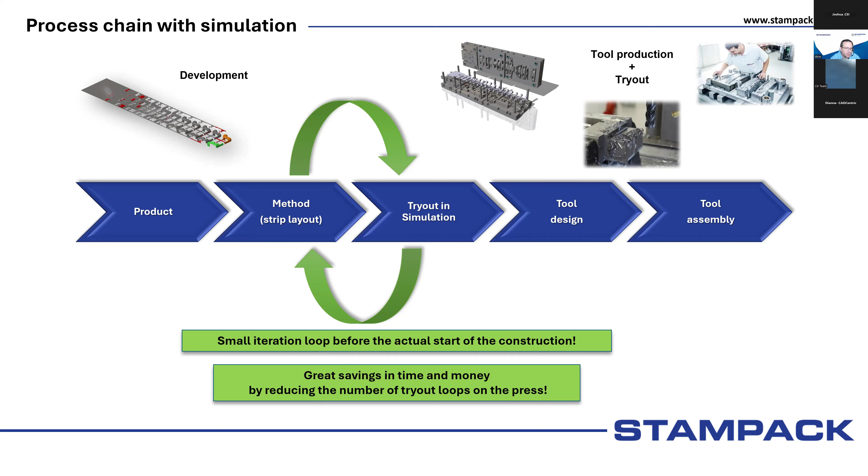So that's all from my side for the day. Looking forward to your questions later on.

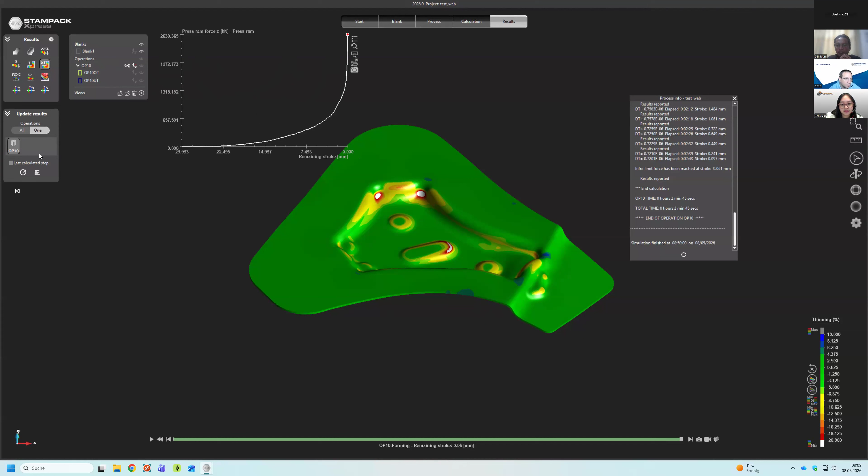The question is from Miss Joy. Now we're back again. When we go back to the simulation we made together, you have the possibility to check each tool in the process. So when we go to the operation, you see directly what tonnage is needed, for example. For this case, we have a 3 millimeter thick sheet, so we need at least 260 tons to produce this part, for example. And of course, with another simulation - let's open another one - that's more or less the full process of this part. Let's go to the bending area, that's quite interesting.

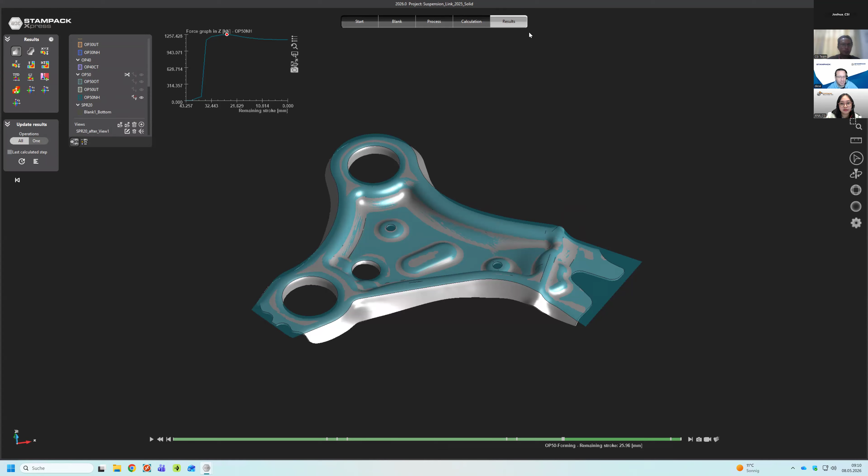Just once more here, we have also integrated a blank holder. You also have the possibility to see the needed blank holder force, so it's increasing up to 125 tons. Then you say okay, it's completely closed in that area. So you have the option to set the correct force and see what happens, or the other approach, where you don't know what force you need, and you can ask the system to tell you what force is needed. Both approaches are possible in that case.

I think this will answer your questions, if not, please give feedback. The customer said yes. Also Sebastian, this tonnage calculation can also be done in Logopress, right? Yep, exactly.

I have one question from another attendee, through text also: are we able to simulate the current stamping configurations of our machines into this system?

Not in detail. What you can integrate is more or less the possible tonnage. If you have a press standing there with maximum 600 tons for example, you can implement that into the system - okay, I have only 600 tons, I have to produce this part, what's going to happen? It could be that the system says we need 0.2 millimeters before closing down completely, we have to stop because we're reaching our limit. This leads to a different springback condition that leads to different behavior in the part itself. That could be possible. But what we don't do is integrate how fast you are driving to the part, or depending on the kind of press, some different speed up of the part itself. That's not integrated actually.

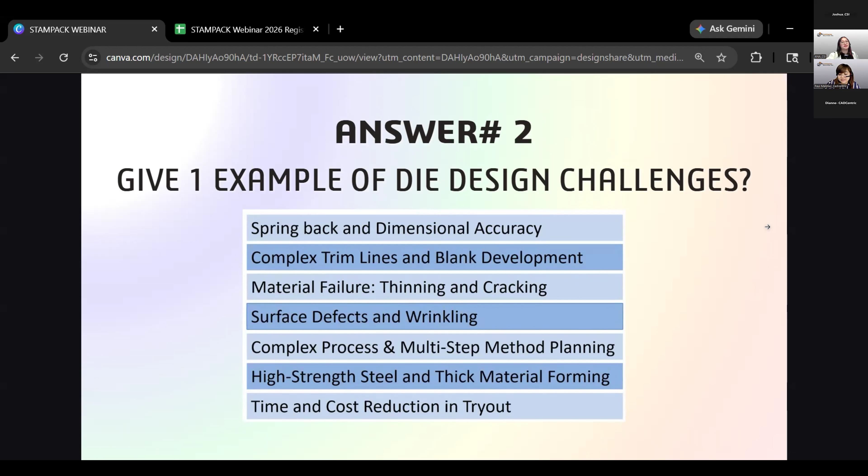Okay, number 3, this is the one you've been waiting for, the main part of this webinar. Are you ready? What is STAMPACK? 1, 2, 3, go!

Sir Shimon already answered. STAMPACK is specialized sheet metal forming simulation software. We'll be considering the answer of Sir Stefano Barros.

Sir Stefano, hello! You were the one who answered first and closest to the correct answer for question 3: stamping simulation for sheet metal. Congratulations, Sir Stefano, from COA. I remember you attended our events before.

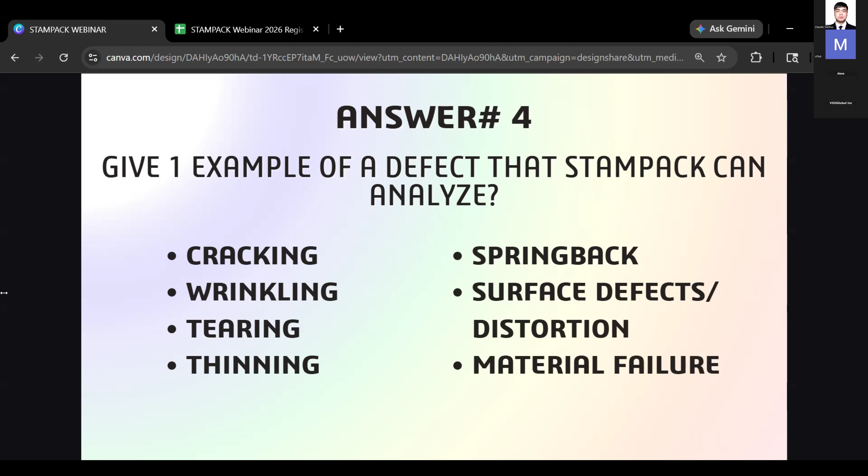Winner. Chat mo na lang sa akin, Sir Sunny, kung sino yung winner. Okay, so for number 5, here is the question. If I said go, doon kayo magsasagot. How Logopress and STAMPACK do in your company or production? Go! Ayan, essay siya actually, dapat 100 words.

Eme, eme lang mga guys. Baka kasi din na kayo umattend.

Ayan, can do, wala tayo nito. How Logopress and STAMPACK can do in your company or production. Sorry, kinopya-paste ko lang kasi yung sinabi. Hindi na.

Ayan, Sir Sunny, may mga sagot na sila, kaso hindi lang essay, hindi pasok sa standards mo. We have to answer.

4 answers na, Sir Sunny. So ang unang sumagot ay si Sir Harold. So from Sir Harold, sir pababa, i-check mong sagot, sir. Okay, si Sir Harold, ang answer niya is actually correct naman. It's prediction, right sir? Tama ba yung answer mo?